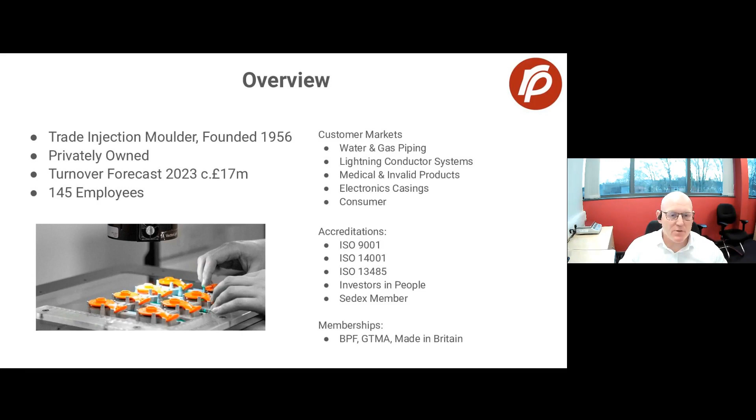So as a business, what do we do? I thought I'd share with you the Rutland Plastics mission. Slightly cheesy, these things sometimes, but actually it does tell you who we are and essentially why we're taking part in this webinar today. We want to work in partnership with our customers, and many of our customers have been with us for many years, some 35, 40 years, and we've worked with them to help them achieve their goals through various iterations of their product range, helping them successfully take them to market, refine them, make them more efficient, and then also develop the next generation of that product.

We're a business that focuses on the manufacturing side and becoming as efficient as we possibly can, but really getting involved with our customers from a technical perspective. And we see our substantial technical team as an extension of our customer. We want our customers to use them for the benefit of their business and their products. But within that, we want to grow our people, we want to grow our colleagues, and we want to do all that we do taking pride in things. We want to do the best job that we possibly can. And that's a nice lead into what we're talking about here.

So where do we start? Well, we start with mold tools. Now at Rutland Plastics, we have our own in-house tool room, and we work with various suppliers in the UK, in Europe, but also in the Far East. And the mold tool is a key part of the selection process.

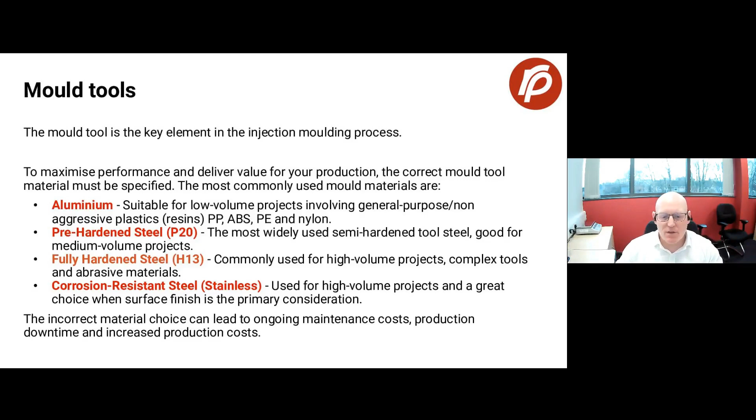And as part of helping with that, we have developed a guide, just quite a simple table on our website, which tries to explain the different properties of different metals when used for injection mold tools. And this is again really part of the ethos of Rutland Plastics, because we want our website, we want our communications with customers to be educational, we want them to be informative, and we want to try and help you develop your project and move it in the right direction. So you'll see more of this on our website.

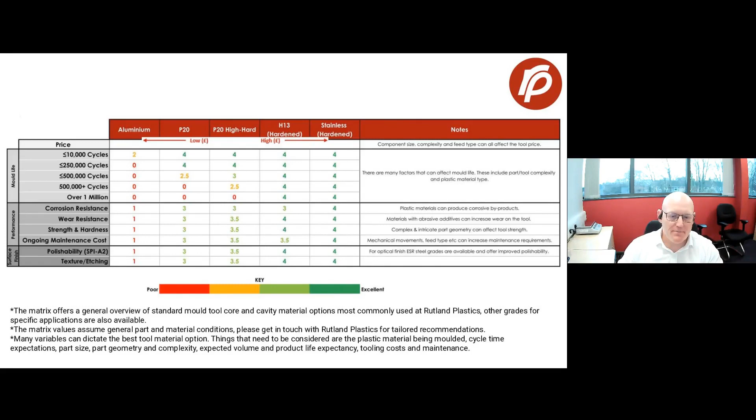But they are reasonably priced. They are commodity materials, and they are very good for what they do. They're non-abrasive. They flow very easily through tools. Therefore, they influence the selection of steel and the decisions that you have to make on capital investment.

But then you can move more towards aesthetic materials, such as ABS. Now, ABS is a very common material in terms of household appliances and can be easily mixed with polycarbonate, which is an engineering grade of material. But this would produce tough, very high gloss, very aesthetic looking products.

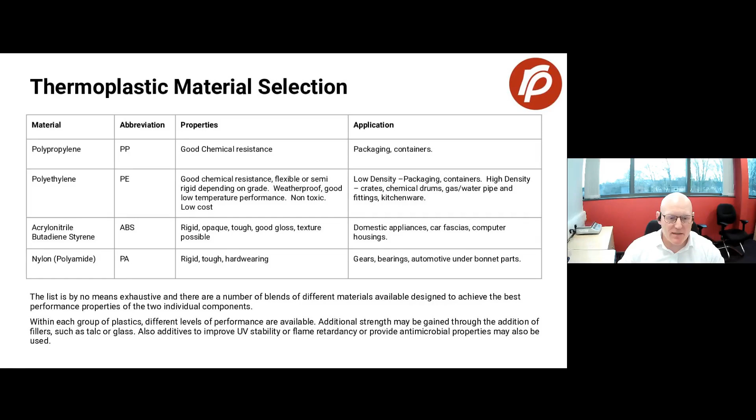And just a bit of an example there, because I've mentioned metal replacement. This is an example of a hydraulic filter which is used in large commercial industrial vehicles. This is a product for a customer called Chainings, and this product would have been made from cast iron and would have been very, very costly to manufacture. We worked with Chainings, and the project took a couple of years to get off the ground, to help them move this to a plastic product.

And that was quite a tough call, because not only did this part need to be incredibly strong, but it also needed to be very dimensionally stable. And that's dimensionally stable when it comes out the injection molding machine, but also for the life of the product, and also when the product is operating in its working environment.

Crucially, at Rutland Plastics, not only do we work closely with our clients, but we also work with our supply chain. And we involved one of our material partners and identified that this product, because of its requirements, not only did it need to be an engineering grade of plastic, such as nylon, but it needed to be a specific long fiber glass additive, which was put into that nylon to give it its required rigidity, to give it its strength, to give it its dimensional stability, and to make sure that it was a product which could withstand the extreme sort of conditions of its working environment.

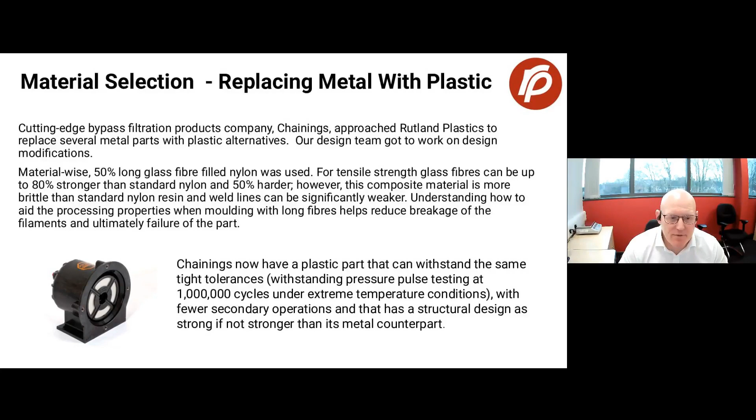You'll also notice on the part as well that it has some metal inserts which were required for assembling the part. Again, because the material is nylon, it has a high melting temperature and it's glass filled. Rather than these be heat staked or tapped into the plastic molding, these are actually ultrasonically welded into it, because such a high level of energy is required. But a very successful project.

Now, the environment is critical when we're starting to think about plastics. And it's really important from a design perspective to think about this. And it's a huge focus for our team. Our design team work very, very closely with our customers, and we've kind of coined the phrase reduce, reuse, and recycle, because there are many ways you can approach designing for environmental concerns. So just taking these one at a time.

Reduce. So our design team, we have a team of 3 product designers, all of whom have come through high levels of training, so bachelor's degrees, master's degrees, to help our customers with this sort of work. They will work with the customer to try and make sure that as little plastic is used as possible. Okay, one of the key things about environmental issues and waste is to take as much of the raw material out as possible. And one way of doing that is through smart design.

Many years ago, products were often designed as sort of thick and chunky, and it was seen that that would give them strength. Well, actually, that's not the only way to give strength. Often smart design, such as ribbing features, or perhaps using additives in the plastic material itself, such as glass, mineral, and natural fibers, can help give strength, and help remove plastic from that product. And that makes it a more environmentally friendly product.

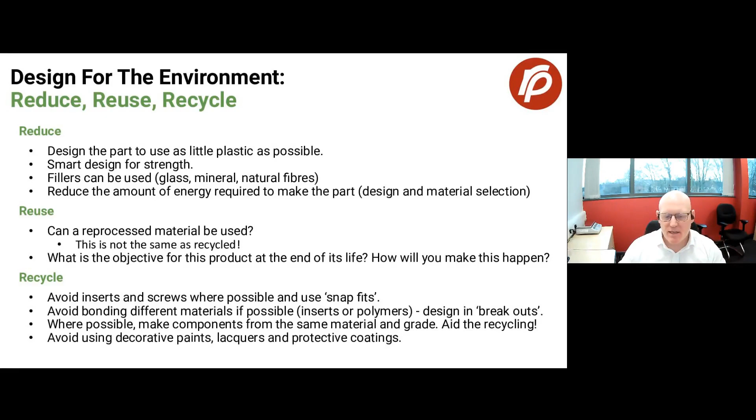And finally, similarly with decorative paints and lacquers, often they can be a contaminant into that process as well. And where possible, how can we work on the design? How can we work on the tool in conjunction with the customer to try and make that part the finished article, so that we don't need paints and lacquers and coatings, so that part is as aesthetic as it possibly can be.

And again, there's more information on our website, which looks at plastics which use natural fibers. So again, if you have a product which you're looking to reduce the amount of plastic in, one very effective way of doing that is by using a hemp additive or a wood additive in that polymer, and that could reduce 20% of the plastic, take it straight out of the part.

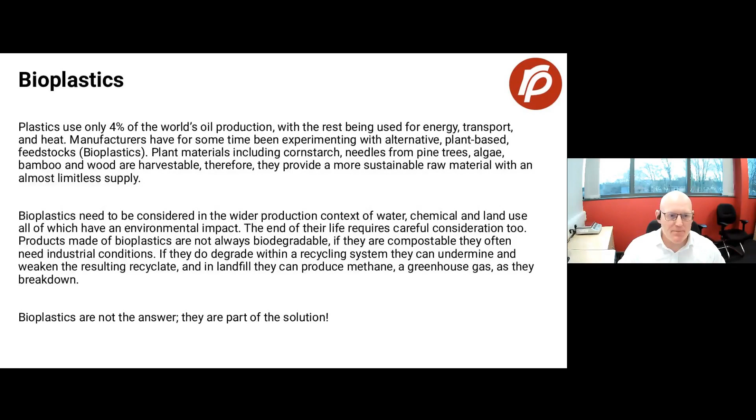So just taking a step back a little bit, design for economy. So again, this is an environmental issue, obviously, because we want our customers to design parts which have as little plastic in them as possible, because they have a reduced carbon footprint, but if they have as little plastic as possible, they are much more efficient to make, and they are much lower cost, which is to the advantage of everyone involved.

Some of you will be aware that when you're designing a plastic part, the thicker the plastic is, the more energy and the more cost there is. Now that cost comes from many different areas. It comes from the fact that you're using more plastic, and plastics are expensive, but also because thicker plastic requires more energy to melt, which extends the cycle time of the machine, and then requires more time to cool.

So again, we want to try and think about reducing the amount of plastic, reducing the thick sections, looking at where two plastic parts are used and perhaps one would do. Again, looking at snap fits and where we can reduce mechanical fixings, and also avoiding secondary operations.

Where can we make a product using one process, one injection molding process, rather than taking something away and perhaps having a secondary manual operation to fix them together, or a gluing operation, or perhaps even welding. So we've got to think about that entire production process, the design of the part, and how to get that as efficient as possible.

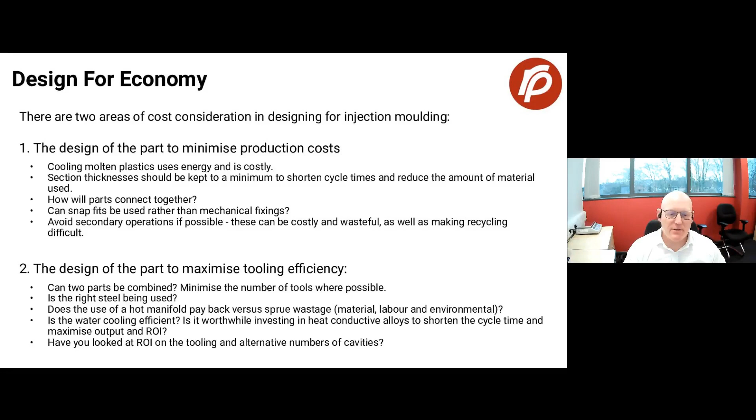So just moving on to some of the common defects that we see with injection molding. The first one to start with, I suppose, is sink marks. We mentioned before that a very efficient way of trying to use less plastic and be smart about design is to use ribs. So rather than have thick plastic to give strength, use a ribbing structure on the underside to deliver those properties. But often, if those ribs are too thick, it'll produce a sink on the top of the part, often on the aesthetic A face, which is quite unsightly.

But often that is a very general rule, and sometimes it doesn't deliver the right strength or the right shapes that customers require. And that's really where our team come in, and they will help customers design that ribbing structure, not only to deliver the aesthetic side of things, but also the strength and mechanical properties of the part.

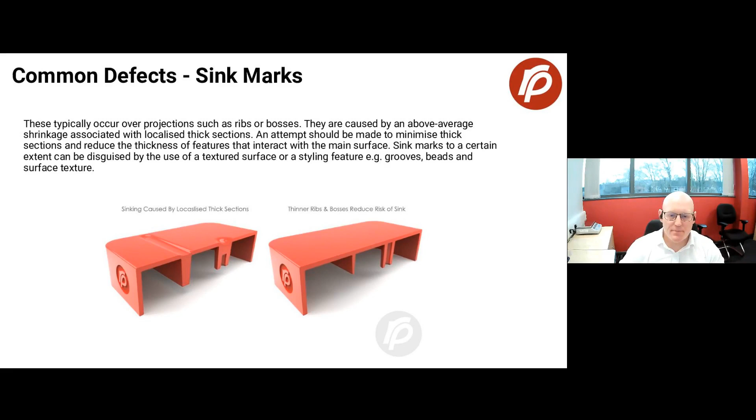Now, that's not something that's advisable. One, it's a waste of plastic having that huge thick mass there, and it's a waste of cycle time and all the energy processes that go into manufacturing. But equally, it can affect the mechanical performance of the part. So it is a weakness, and you could see problems coming from those areas.

But equally, if it's a part which needs to be machined or worked on afterwards, those voids would be seen as you started to machine into the plastic, and that level of inconsistency is often problematic. So again, we would work with customers to try and reduce that thick section, look at ribbing structures, look at ways of coring out, not only by using design, but also by using features within the tooling to deliver that.

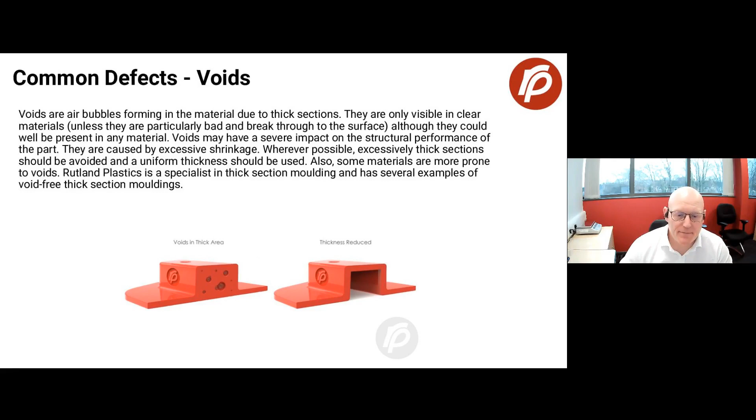And we get a weld line because as the plastic flows round this feature, it's cooling down. So when it gets to the point where the two melt fronts come together, the plastic isn't as molten as it was. And again, it creates a visual effect. So the weld line can often be seen, and it creates a weakness.

Now we can work with the customer to try and modify the design to minimize that. There are ways that we can minimize the effect of weld lines in the tool, but they are a natural feature of injection molding, and it's something that needs to be considered, and it's something that we would work with customers on when we go through the design for manufacture process to firstly identify, but secondly mitigate any risk that comes from them.

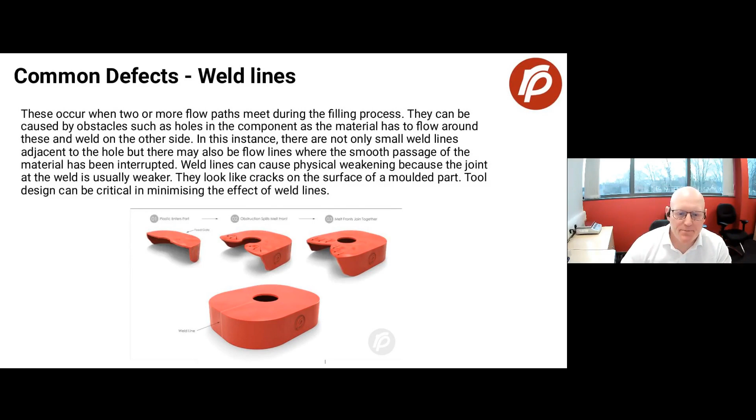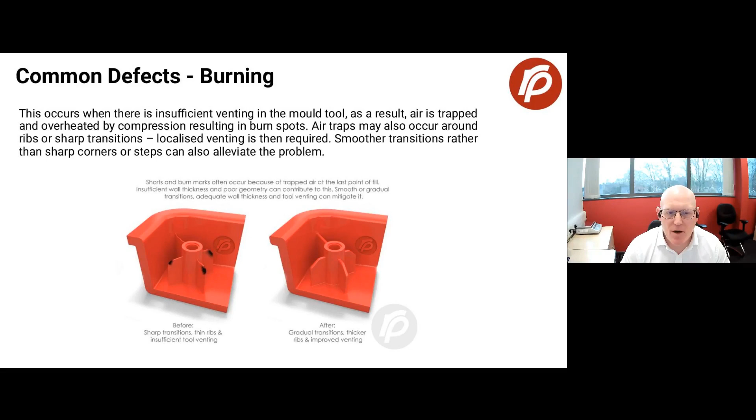Equally, this could happen where we have a weld line as well. Again, it's something that we have to work through a design for manufacture process. We have to identify where the risks of burning are, because it's pushing gas, so we have gas traps. We have to look at how we can vent that. We have to look at how we can design the tool such that the tool will expel those gases and minimize this sort of risk, because not only is it unsightly, but again, it does affect the mechanical properties of that part. But these are all standard things that we work through.

And a bit of a design tip, because often when we have problems with something like a weld line, and a weld line is something that will always be there. If there's a feature in a product, a weld line will always be there. It's just a matter of how easily you can see it. One way of disguising it, one way of reducing the visual impact of it is to use a texture or some kind of chemical etch on the tool.

but actually genuinely give it a nice finish, whether it be a leather effect or a nice satin effect, or in the case of a very, very rough VDI, it might deliver some kind of property to the plastic part that's crucial in its function.

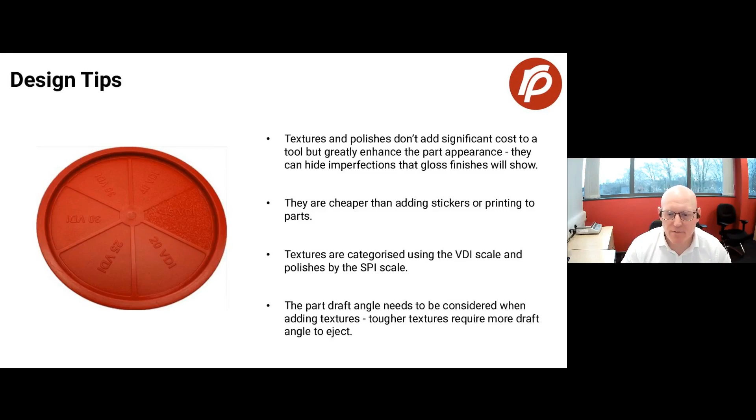So that's really it in terms of the overview of design for manufacturing, and I understand there may be time for some questions. Yes, absolutely. Thank you very, very much, Stuart. Yes, we have a few questions. Let's crack on with them straight away.

How do I know if I have the right number of cavities in a tool? Okay, yeah. That's a good question, because often when we're talking about cavities, it could be a tool that has a number of cavities, but each cavity makes a different part, or it could be a tool that has a number of cavities, and each cavity makes the same part. And of course, it goes back to my point earlier on, which is about return on investment, where the product is lower cost or lower volume. Often it makes sense to put different parts in one tool.

So you've got a number of cavities, each making a different part. That's a very low cost way of approaching things, but it does come with some downsides, because what it means is that the plastic needs to be fed through that tool to parts which sometimes look and weigh differently. So one part's heavy, one part's light, or it could be that one part has a high aesthetic finish and the other is an internal part, and it's very difficult to get that balance. And when I say balance, it's a balance of ensuring that plastic flows through the tool in a balanced way to deliver everything you need to parts that are actually quite different.